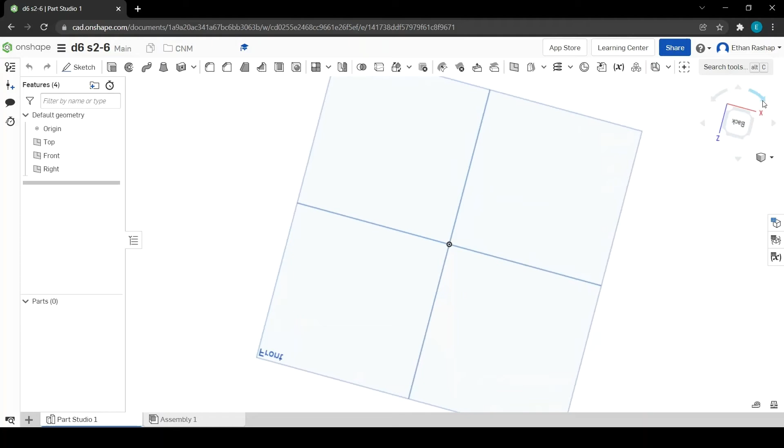Another thing you can do, if you hold down right click on your mouse and just move your mouse around, it'll also rotate that for you. And of course, if you want to zoom in or out, you can use your scroll wheel, and then if you hold down left click, you're going to be able to select, which we don't need right now. If you press down on your scroll wheel, which is mouse 3, if you didn't know that, it'll let you just move around in a two-dimensional plane here. And so that's sort of the important part.

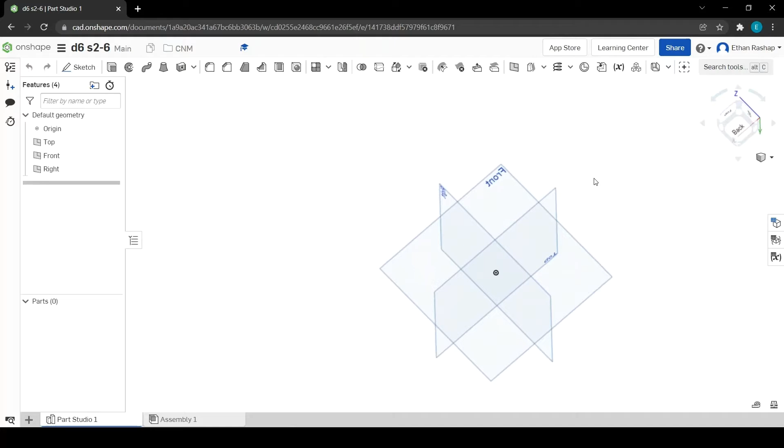If you really need to move around like this, that's great, but try and get comfortable. This program's sort of fast with how it moves if you hold down right click, but it works. And you'll see me sort of come around and look at things from different angles.

And so yeah, that's sort of the basics for this right now. As you can see, we're oriented in an XYZ axis, which is good to keep in mind as we're designing, so we can know our up and down, all that stuff. So yeah, this is a very helpful tool.

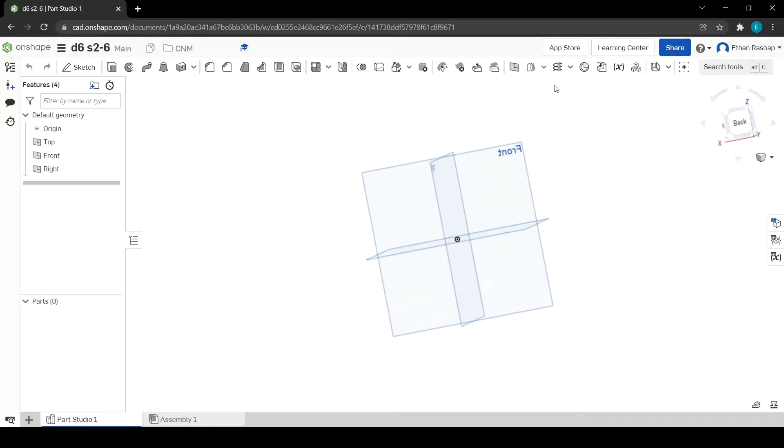I'll be using this a lot, more so than the right click and hold. I'll probably be using this a little bit more often this video, and then in later videos I'll transition to doing it a little bit faster with that right click. So just get comfortable with that. I know it can be a little bit hard, and this sort of moves fast, where you can get oriented really fast. As you can see, it's sort of moving around fast.

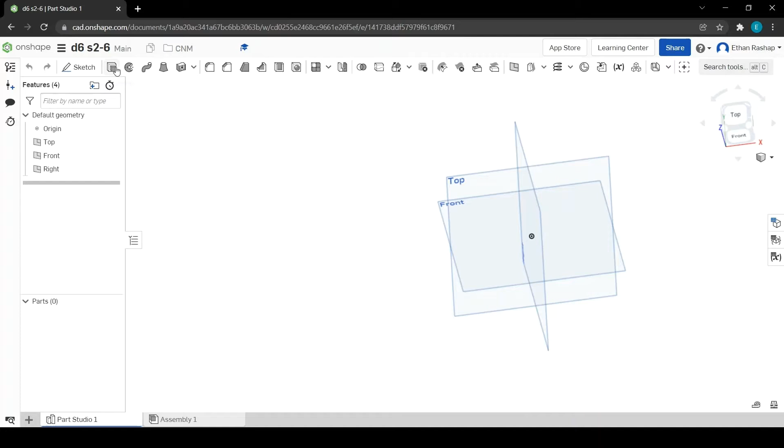But yeah, up here at the top of our bar, we have Sketch, which is how we do all of our drawings. I recommend you actually hover over each of these, it'll tell you what they are. Most of them are just names, but Sketch gives you an actual definition. So we're going to make sketches in CAD, and then we're going to make bodies out of it using these tools. We have extrude, revolve, sweep, loft, thicken, and all this stuff, plus some other features. Don't worry, we won't use all of these today, but we will get to them eventually.

Another feature I want to point out is this bar on the left side under Features. This is going to be like a list of everything you've done. As we go on, I'll point it out, but every step you make will be listed right under these planes, as you can see. Everything we make from here, all the sketches, all the bodies, will list under here, so it's a good way to keep track of your work. You can go back, you can move this bar around. Once I get more, I'll show you how. You can also search for stuff, which is pretty helpful. Parts will appear down here.

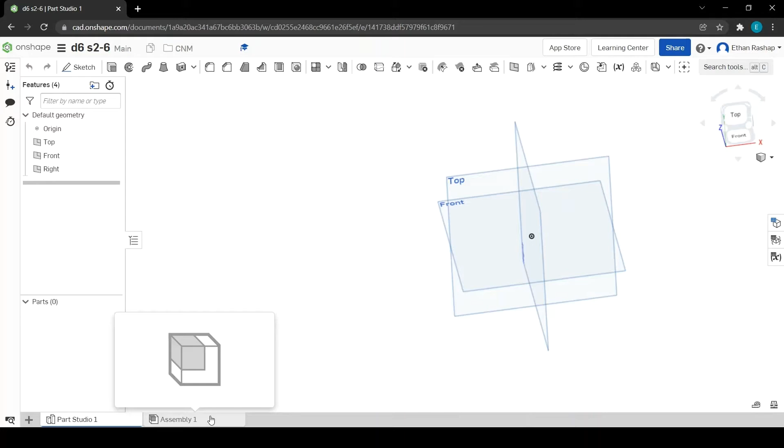So yeah, let's go ahead and get started with this. We're just going to make a simple 6-sided die today. As I said, we're going to have that side with the 1 on it detachable, so for that we're just going to make sort of a hollow cube missing one of its sides. Let's go ahead and get started.

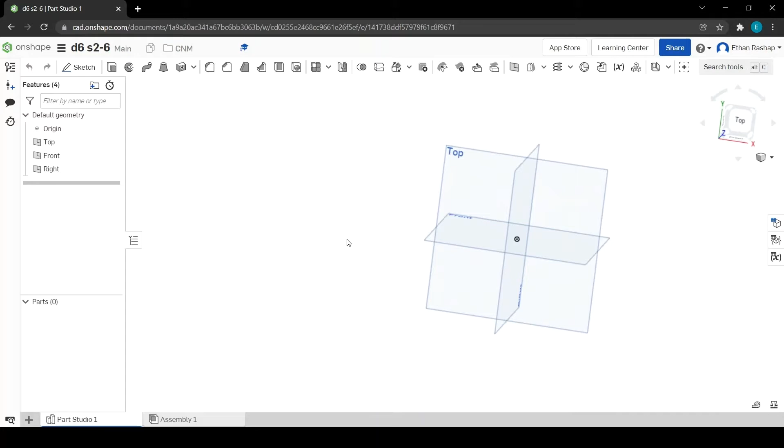You're going to come up to Sketch, click on Sketch, and it's going to have this box pop up so you know you're in Sketch. It's going to highlight this sketch plane in blue, wanting you to select the sketch plane. These are our 3 main planes right now, so we're going to use these. I'm going to select the top plane here, and as you can see, that's selected. We could change that if we wanted.

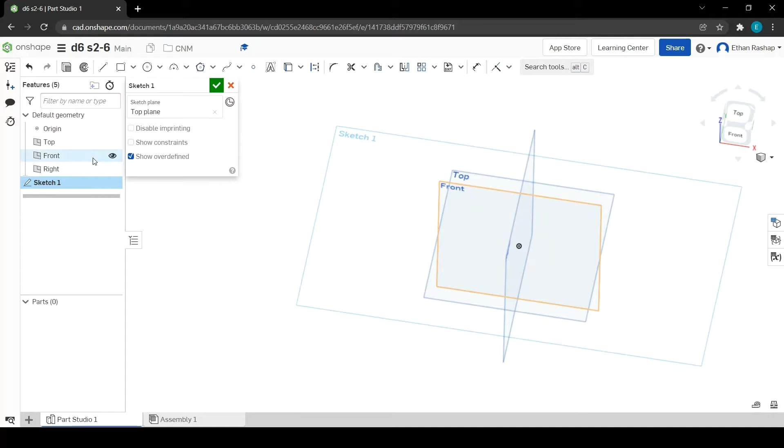I'm actually going to come over here, click this little eyeball for these other 2, and it's going to hide those planes. Now, just to make it ease of view, I'm going to click on the top here, on this cube on the side, and as you can see, it's going to bring us right down on top of that plane.

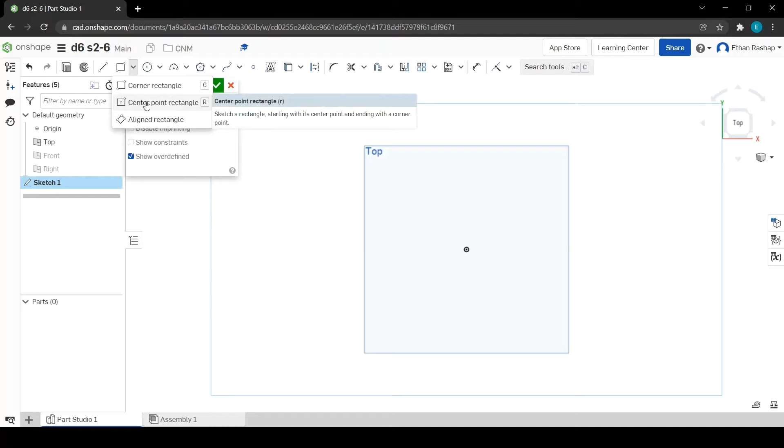Now I'm going to come up here to our corner rectangle. I'm going to click this little dropdown menu. As you can see, most of these have dropdown menus next to them for slightly different variations. This first one's a corner rectangle, but I want to use a center point rectangle, so I'm going to grab that. It's blue, so you can see it's actually selected. I'm going to click on this little origin point right here and just drag this out, left click again, and there we go. That's our first little square there.

I'm actually going to turn off this top plane too, because that's sort of just going to get in our way. So now we have this top little plane. Hit escape to get out of that rectangle. As you can see, I'm in it, but if I hit the escape key, I'm out. Otherwise if I was in here and tried to click around, it would just keep making rectangles, which I do not want.

So now I'm going to come up here to this little dimensioning tool. As you can see, these also have little shortcuts - the key in the parentheses. If you hit D, it'll put you into that dimensioning. If you do R... circle should be C, there we go. You can do that as well, but I'm not going to be doing that so you guys don't get confused. I'm going to hit this dimensioning tool.

I'm just going to hit this side. You can see as I pass over it, it'll turn orange, and when it turns orange, it means that I can select it if I left click it. And as you can see, I'm going to drag out this little bar here and click again, and it's going to highlight this number, so this is going to be the dimensions of that side there.

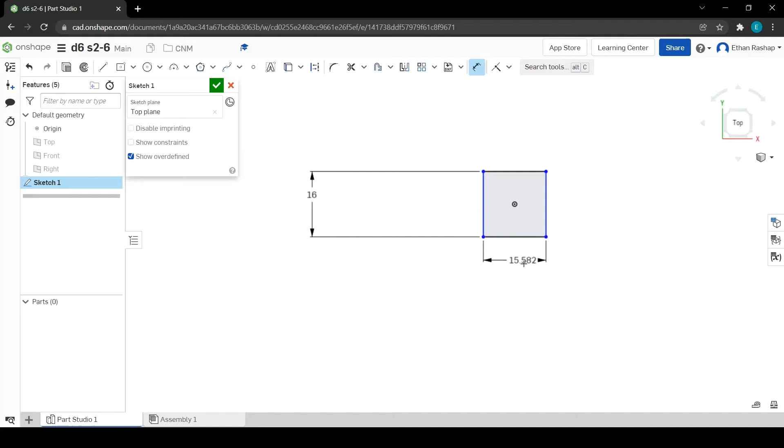So I'm going to make an actual size die, and I want this to be 16 millimeters. As you can see, it really shrinks that down. And I'm going to also do this side, make this one 16 millimeters as well. And there we go, so the purpose of this is just to square it off.

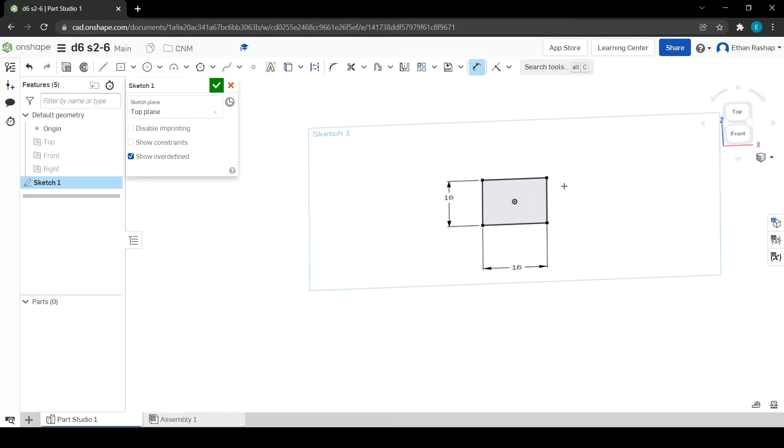You can of course dimension other ways, but this is how we're going to do it for right now. Just bear with me, and that's going to be all we need for this first sketch. As you can see, I'm holding down right click and moving. So once you're done with that sketch, come up here, hit that check mark, and you can see we have a nice little rectangle.

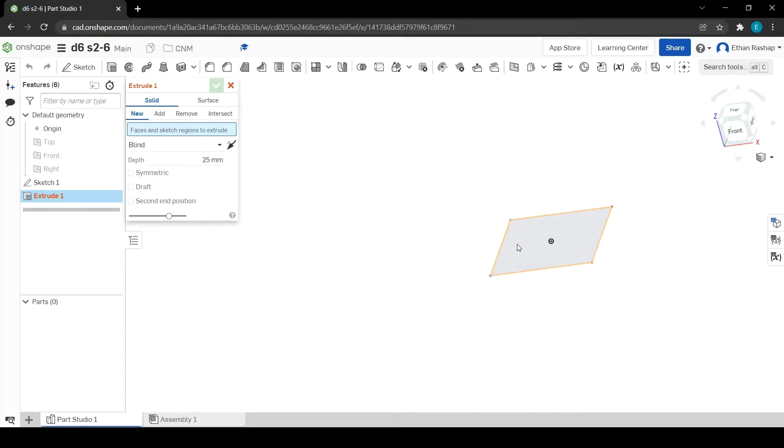But we don't just want a rectangle, we want a cube. So I'm going to come up here next to sketch, right to the right is this extrude button. I'm going to hit extrude, and it's going to ask for faces and sketch regions to extrude, which is going to be this one right here. As you can see, as I go over, it's going to turn orange. I'm going to click on that, and as you can see, it just pops it up. It's automatically 25 millimeters. We want to change this to 16 because we want a perfect cube.

Hit OK there. It's also worth mentioning here, I keep putting millimeters, but I can put just 16 and it'll automatically do millimeters. I could do 16 inches, and it will do inches. But the default for this program is millimeters, so you can type just 16 or 16 millimeters, either way it'll get you your millimeters. You can use feet, inches, meters. I assume you can use higher. I don't know why you'd be doing kilometers or miles or anything like that.

So anyways, this is good for right now. So I'm going to hit this check mark again, and there we go. We have our beautiful cube.

So now what I want to do is I want to make this hollow. And these programs all have this cool feature called the shell feature. So if we come right up here is this little box, I'm going to click on this. If we let this expand, create a thin walled part by removing one or more faces, specify the wall thickness for the remaining faces.

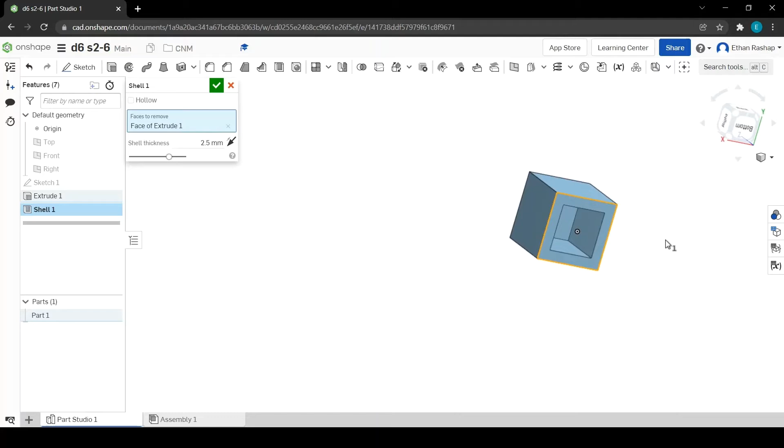So this is going to do, I'm going to click on this bottom face. This is the one I want to go away. And as you can see, it already is hollowing that out, which is exactly what we wanted. So now I'm going to shell this. If we come up here, I want this to be 1 millimeter. There we go, nice and thin there. And hit that check mark. So there we go.

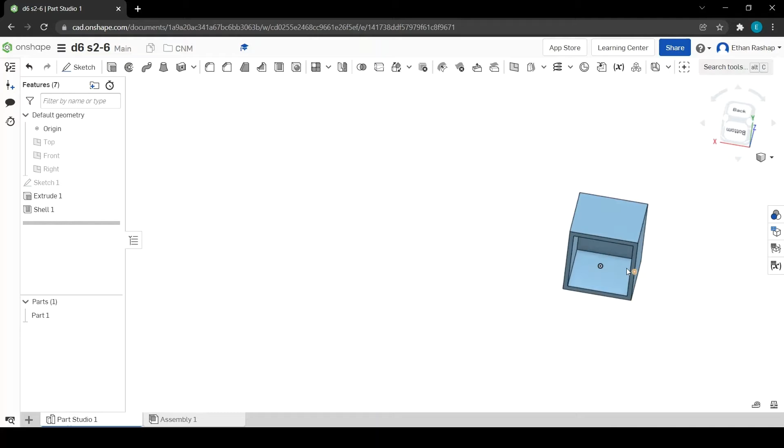So this is going to be the basis for the other parts to connect. We have some clips on the other side, but we need a little lip in here for it to snap into. And so for that, I'm actually going to need to make another plane to do it, because I don't want the lip here at the bottom.

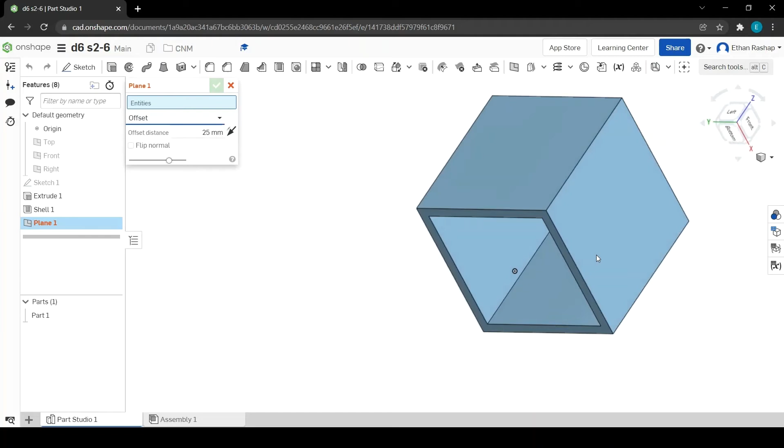So for this, I'm going to come up here to this plane, click on this. It's going to ask for entities to offset from. I'm going to come in here, zoom in here, click this bottom piece here. Let's zoom out so we can look at this. I'm going to click this arrow to reverse it, and I am going to make this 2 millimeters. As you can see, this is now inside of our plane, which is perfect.

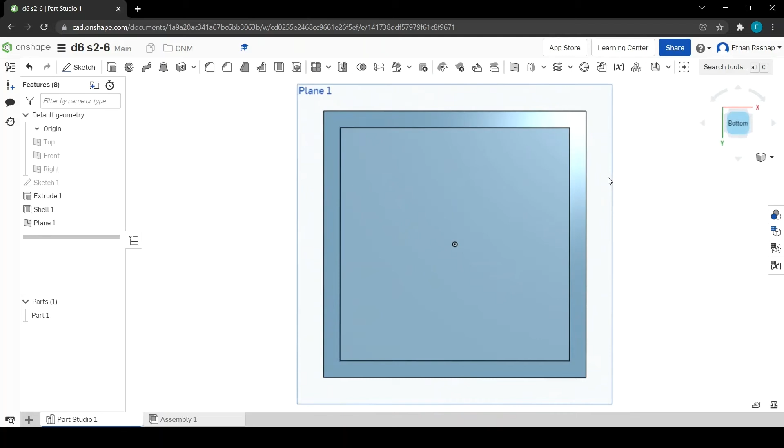It's what we want. Hit the check mark there, and I'm going to come over here to the bottom. And so to make this lip, what we're going to do is I'm going to create a sketch on plane 1. And I'm going to be using a rectangle, so let's make a center rectangle.

And we're going to dimension this just like we did the other one. So 16, we need 16 minus 2, so 14, and 14 to fit this inside.

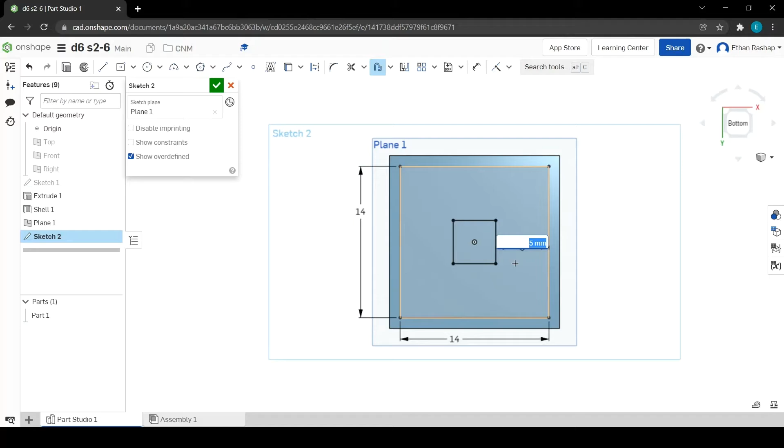Now we need another one inside, but instead of doing that over again, we can use this cool offset tool. If we hit offset here, as you can see, it made it outside. If we hit this arrow, it's going to bring it inside, and we can change this to 1 millimeter. There we go, we have a perfect offset there. It's sort of hard to see, but at this angle you can see it's inside.

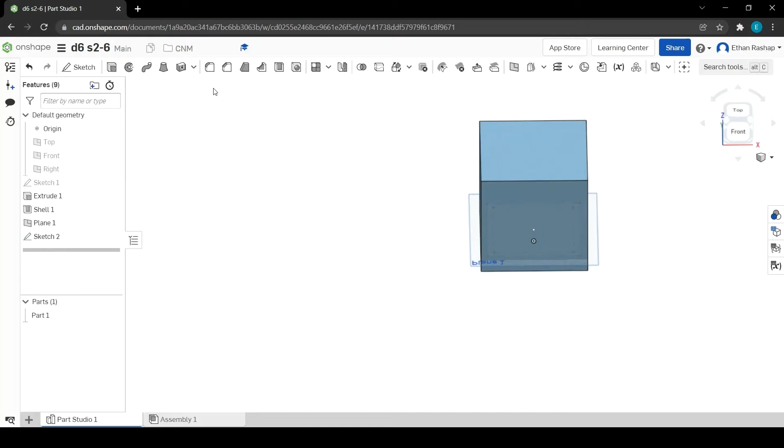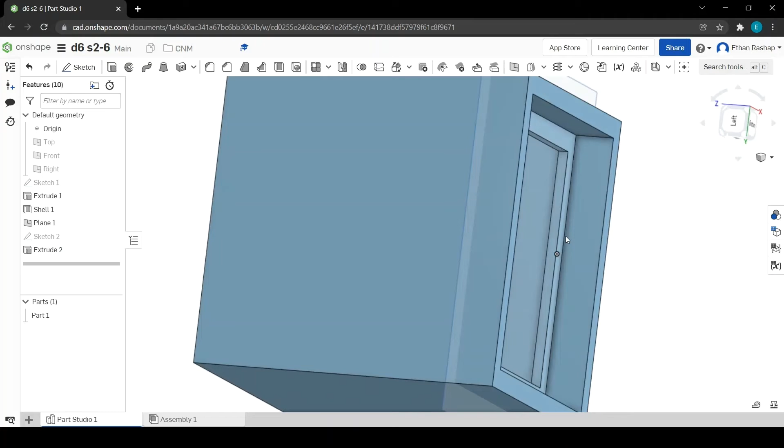Awesome. Okay, so now I'm going to hit OK on that sketch, come over here to extrude, and I can just click on sketch 2 here on the side. And it's going to go the other way - I don't want that. I want this to be 0.5, and it's going up, which is perfect. I'm going to hit that check mark there. And as you can see, we have this beautiful little lip here, which we'll be using later to attach everything.

So now let's go ahead and put some numbers on this die. On a die, the opposite sides add up to 7. So opposite of 1 needs to be 6, 3 needs to be 4, 2 needs to be 5. So let's go ahead and get started.

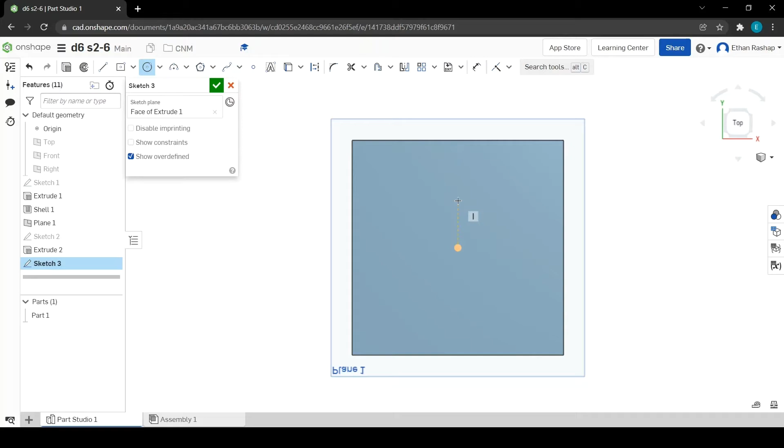On the 6 first, I'm going to sketch. I want it to be on this face, so I'm just going to click here. I'm going to go back here to the top, and so I just need to make some circles. As you can see, if I line up, it's going to show me that I'm directly going in a vertical line away from that origin, horizontal, vertical. I'm just going to click here. As you can see, I misclicked there.

I'm going to dimension this to be 2.5, and I'm going to dimension this from the center 3.5. There we go. And so now I could go sketch the other 5, but I'm going to show you some other tools on how to do this well.

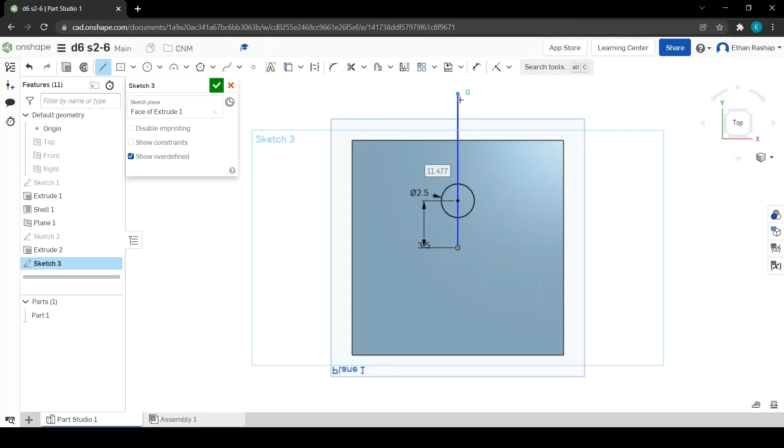I'm going to first create some construction lines, so I'm just going to make a line here and make another one this way. As you can see, these are real lines right now, they're intersecting with my sketches, but if I come on here and right click on here and come down to construction, this is no longer part of my sketch. It's just a reference line that I can use to dimension, build off of, all of that fun stuff. So for right now we can sort of ignore these - I'll show you why we need them in a second.

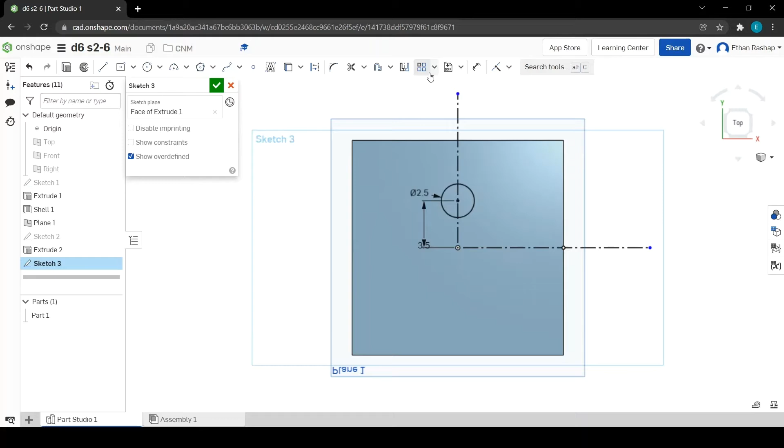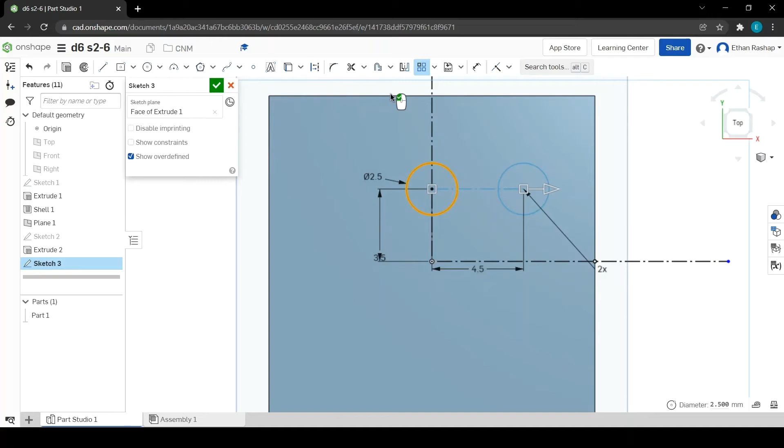We're going to come up here to linear pattern, hit linear pattern. I want to linear pattern this. I don't want this to be 25, I want this to be 4.5. Bring that in. I don't want 3, I just want 2. There we go. As you can see, it just pulls it out. I can actually move this if I wanted to and increase the number however much, but I don't want to do that, so I'm going to make this 4.5 again. And there we go, I'm just going to click out of that, and there we go.

Another cool thing, much like linear pattern, is this mirror function. So I'm going to click on here, and it's going to say select a mirrored line. I'm going to select this line right here and select entities to be mirrored. We want these 2 circles, and as you can see, they appear right there. So I can just click and hit escape, and there we go.

I'm going to move this out of the way. So there we go, we have those 2. We need 2 more over here. So just like with the same mirror, we're going to use this as the mirror line. Boom, boom, there we go.

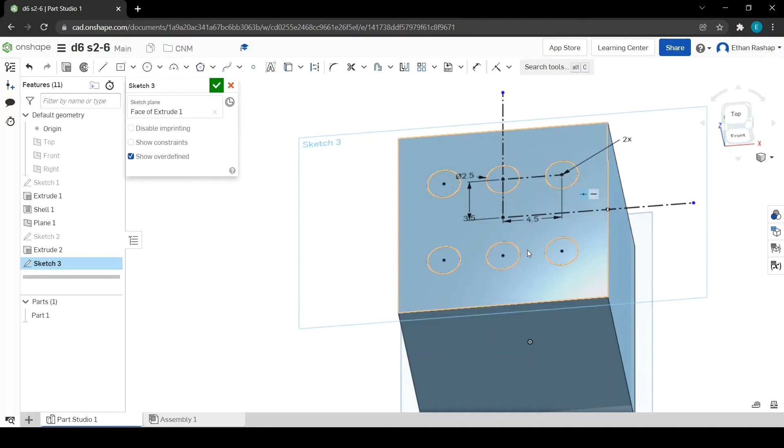And as you can see, we have this beautiful 6-sided die, although we need these to go in, right? They are cut into the die. They're not just on the front, because you wouldn't be able to see these, especially if you print it out.

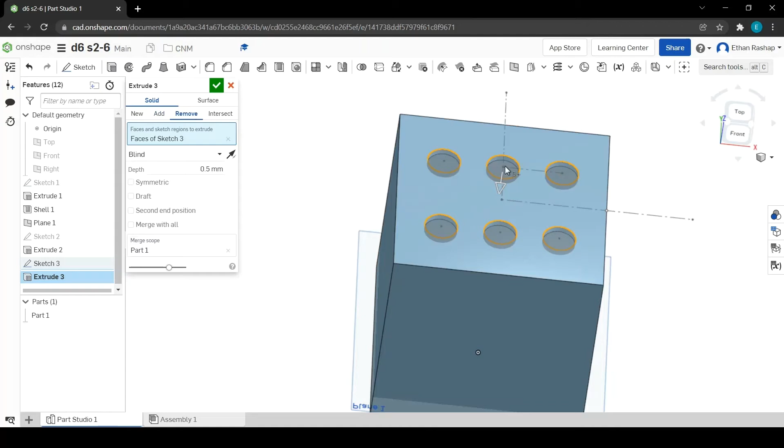So let's go ahead and hit extrude here. As you can see, they're far up, so we're going to want to do 0.5, and they're still pointing up. I want them to go down. It has an issue here because it's trying to add stuff, but I'm going in, so it can't do that, it's trying to remove. So I'm going to remove, and that issue clears up, 0.5 millimeters. Hit this check mark, and there we go. There is our first set of numbers on this die.

Let's go ahead and move to the next one. As you can see, I have this plane down here, plane 1. I'm just going to click on this eyeball, get rid of that, we don't need to be seeing that.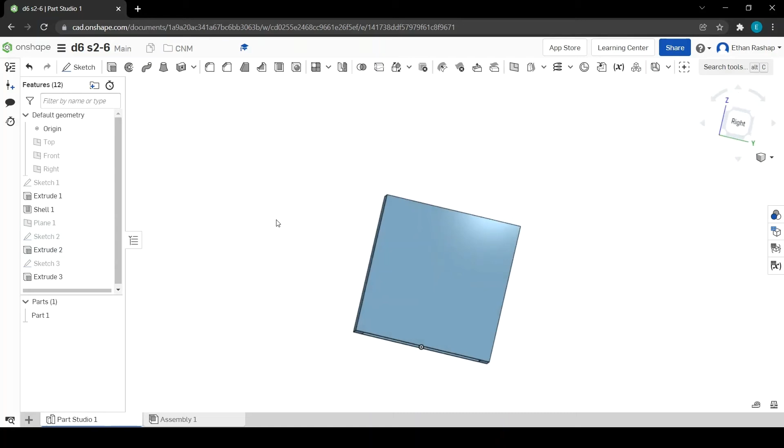Here's actually what I was talking about earlier. As you can see, we have all our parts here. If I grab this bar and move it up here, it's going to reverse it back to that point. Your stuff doesn't go away, it's just going to reverse it so you can see it. There we go, see? We are back to how we were.

Let's go ahead and make the 4 side next. So sketch this side, come in here to the right side, and I'm going to create a line all the way down here. Right click on that, construction. I'm going to also create a line, and let's just make one more to make this easier for ourselves.

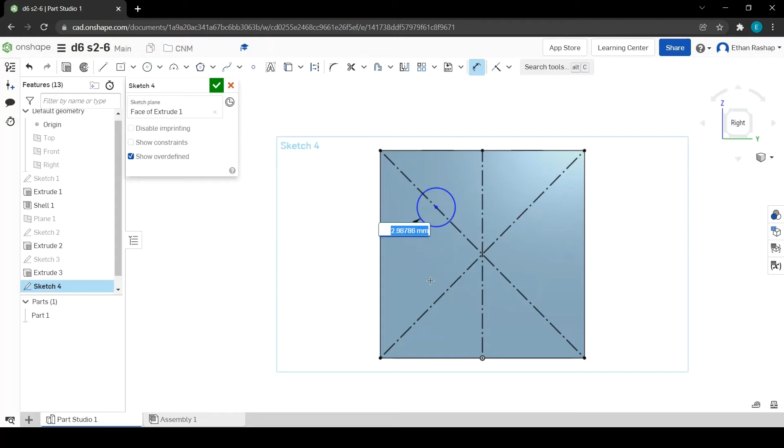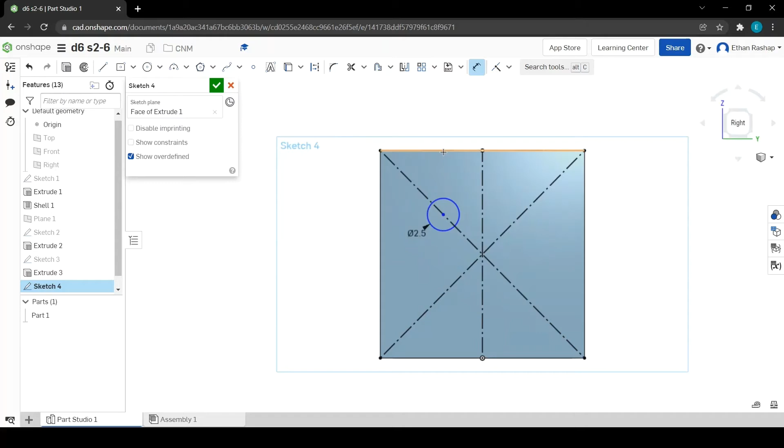Now what I'm going to do is create a circle somewhere on this line. I'm going to dimension this 2.5, move this, I want this to be... now you can see I can sort of move it along this line here. I want this to be 4. Let's see if that would work, yeah, 4 works.

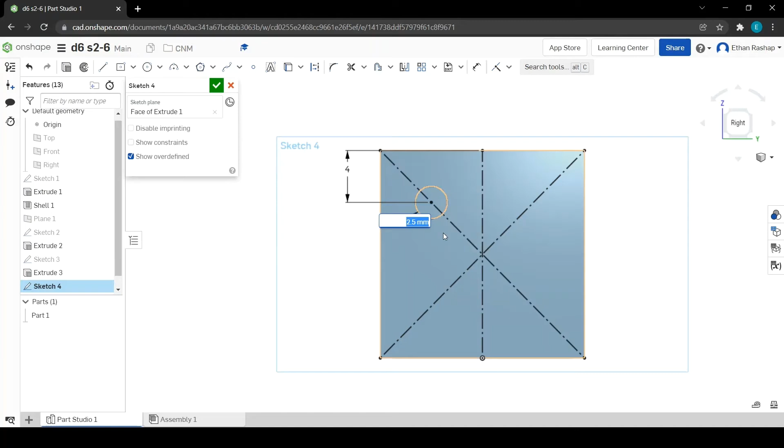If you make it on the line like I did, so say I make the circle on here, it will only... sorry, Control Z, get that away. And dimension it, obviously that's not working right now, I'll show you that in a second. So here we go, that's the first one. Let's actually make this into 3.5. No, that's too big, let's do 3.

That's good enough. So now we can do the same thing we sort of did before. Let's mirror this across this. Boom. Hit escape, there we go. We got 2 going so far.

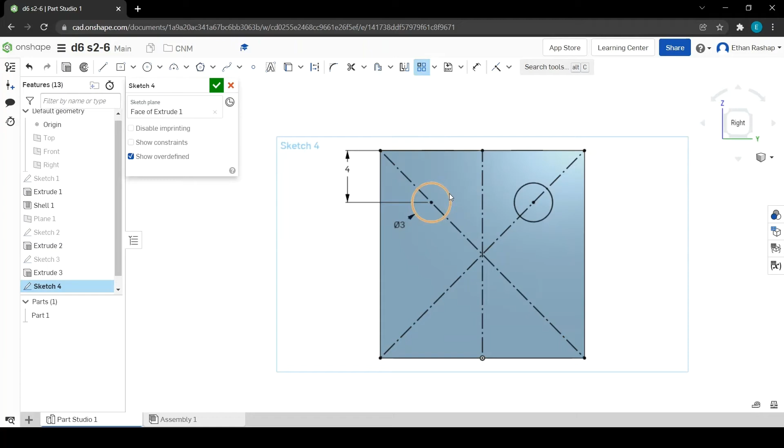So now let's try and use that linear pattern again. I'm going to linear pattern these. I want this to be, let's see, 4, 4, 8. I want this to be 8 millimeters. Now you can see it sort of lines up there.

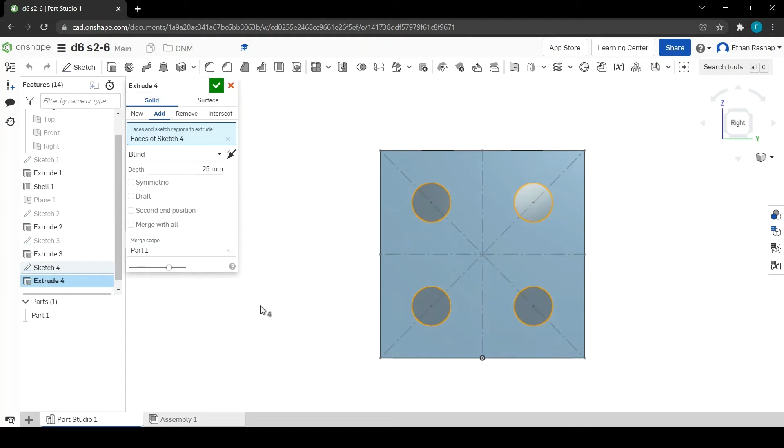We're actually going to get to go back this way. We're just going to create another line here, and we'll just mirror these across this line, boom, hit escape, come back here to extrude. It's going to have those selected already because it's a smart program, 0.5, switch to remove, down, hit OK, there we go. So we have 4 there, 6 there, we're going to need 3 on this left side.

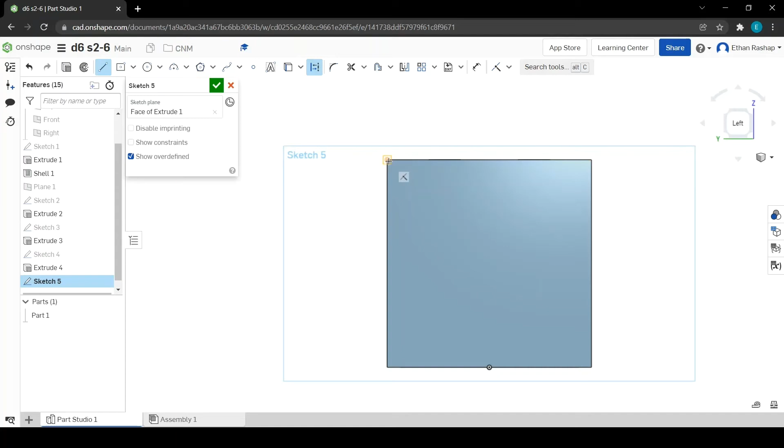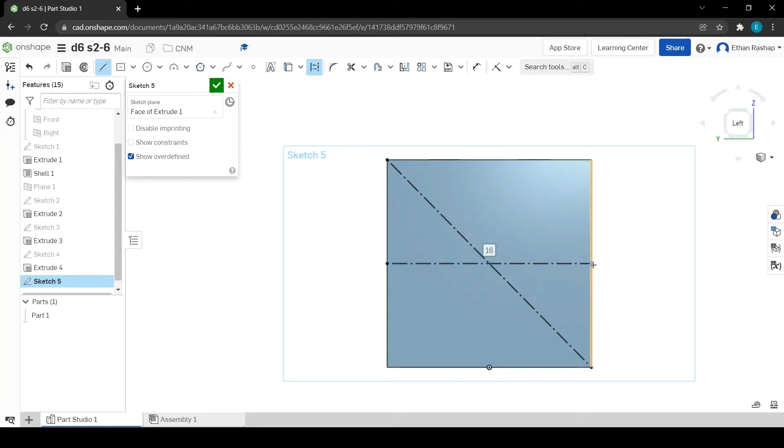Take it nice and slow. So I'm making that construction line across there, and I'm going to... I'm actually going to make another construction line here, over to here. Circle, circle. Dimension this to be 3. I'm going to want this to be 3.5, because we're going to have to go, let's actually make that 4. There we go. So we're going to want this to go across this line here.

So now let's make another one here at the center. I can make another one over here. 3, 3. We want this one from here to be the 4 as well.

No, I did that from the side if you saw that. Delete that, delete, there we go. Dimension from the center out to the side here. Make that 4. There we go, so that one's centered.

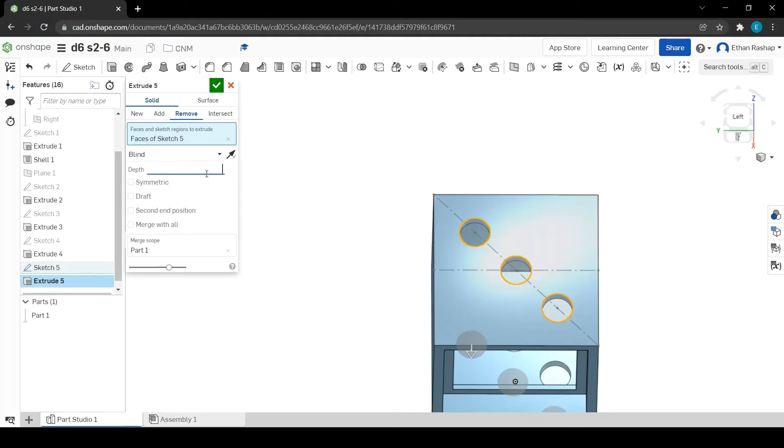Those are all good. Let's extrude these. Remove, 0.5, and hit OK there. So now we have our 3, our 4, our 6. So now all we need is our 2 and our 5.

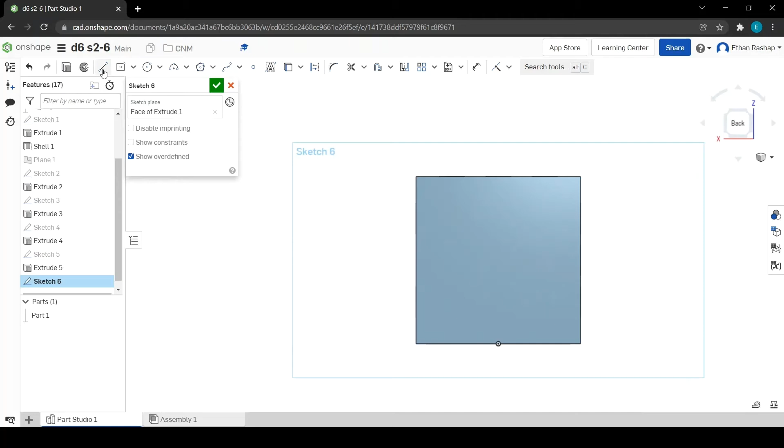Let's do the 2 on this side. Go right to it. Create that diagonal there, I'm just going to right click on here, construction. Now we can draw our circles. As you can see, that made that a construction circle too, so let's exit out of that. Do one there, one there.

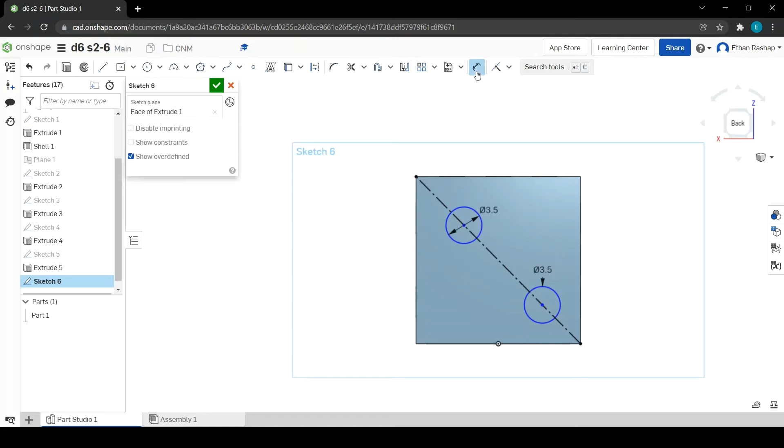Let's make this 3.5, we want this to be a little bit bigger, not too much, but... And let's dimension these from center to side. Dimension, center point to side. Let's make this 5. Center point to side, 5. There we go, nice 2.

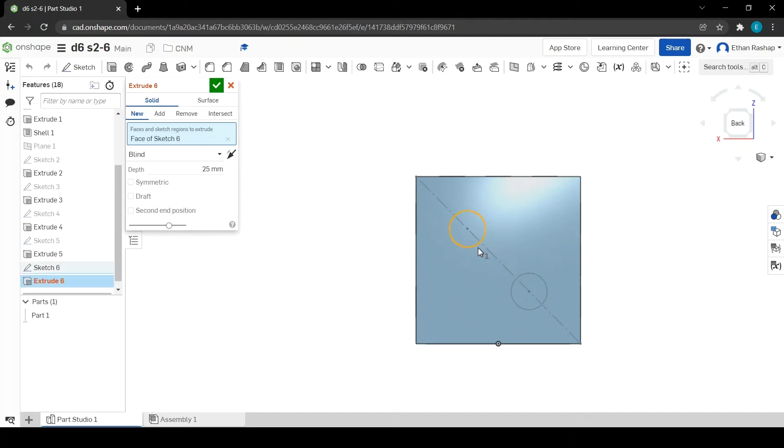Hit OK there, we can come over here and go to our remove, 0.5, hit OK, awesome. So now all we're missing is our last side here, our 5.

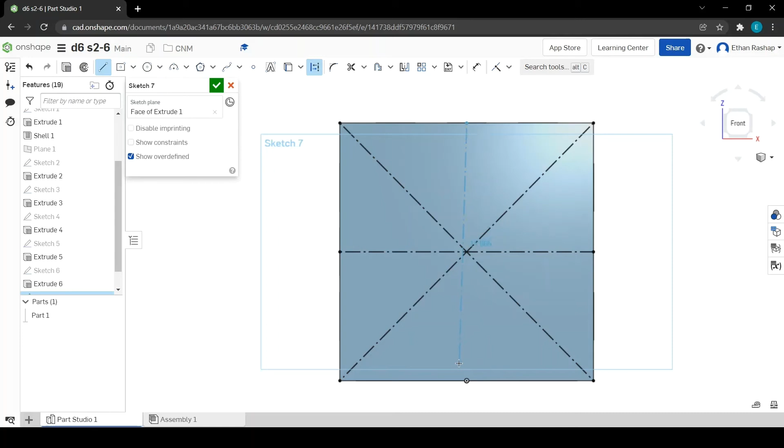I'm going to come in here and do a construction line. We'll just do the mirrors this time, just to get some more practice in with that. So let's go ahead and do this. We want this to be 3, and on the center here we want this to be 3.5. Now we need to make one more in the middle.

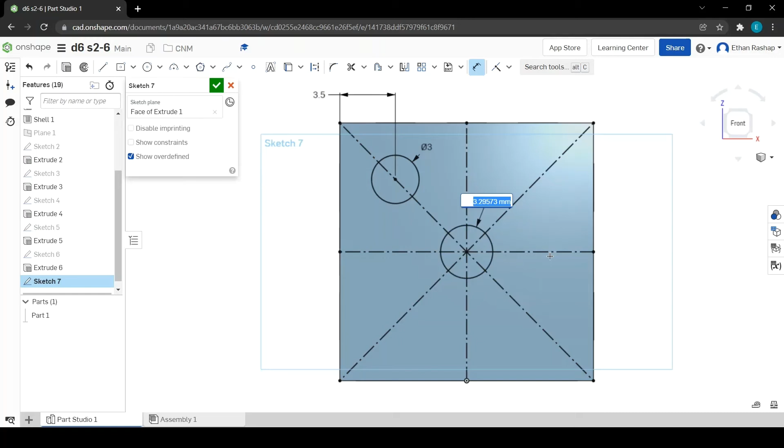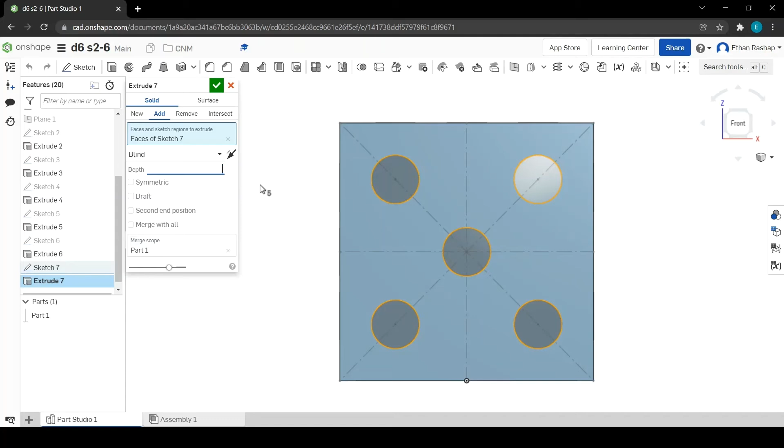Now we can go ahead and just mirror everything. So let's mirror across here, hit escape, mirror again, this line, select these two, hit escape. Now let's come over here to our extrude, 0.5, remove, and hit OK there. So as you can see, I'm sort of looking at this.

Part of this is sort of problem solving at the same time. I don't like how that 2 is uneven, so let's go back here to these 6. Let's double click on that back here, and let's change these back to 3. This is the great part about this software, we can just sort of change this whenever we want. And I want these to be a little bit closer now because they're a little bit far apart. So let's do 5.5. There we go. And hit OK there.

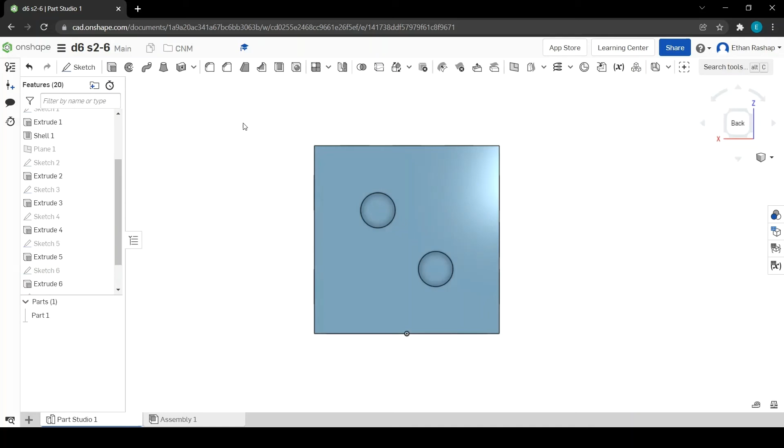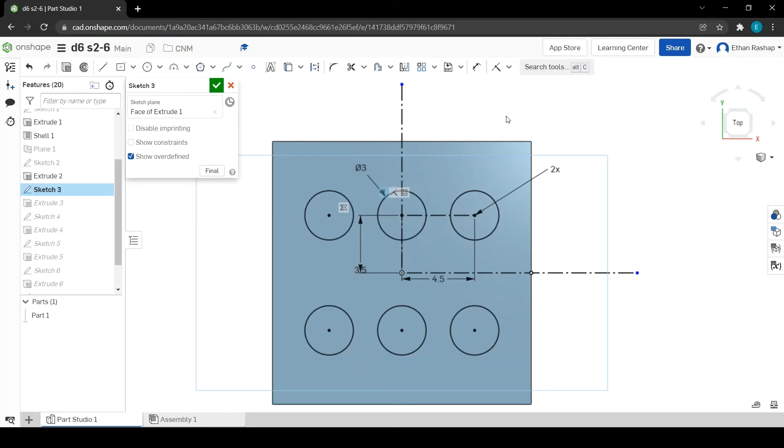And it's going to go back because it's still using that extrude. So now let's actually go back to this top sketch here, because I want to change this too. These holes are looking a little bit small, so let's go ahead and edit these to be 3. And since all of these were referenced off of this one, changing this one to 3mm changes all of them. So I'm going to hit OK there. And there we go, so our cube right now is looking pretty good.

Last thing we want to do, these edges are sharp. We don't want sharp edges on a cube. We want it to roll, we don't want it to hurt when we're holding it. So we're going to come up here to use the Fillet Tool. I'm going to click on here. If I just hover over this for a second, create constant or variable edge, it's basically going around the edges. So I'm going to click on this.

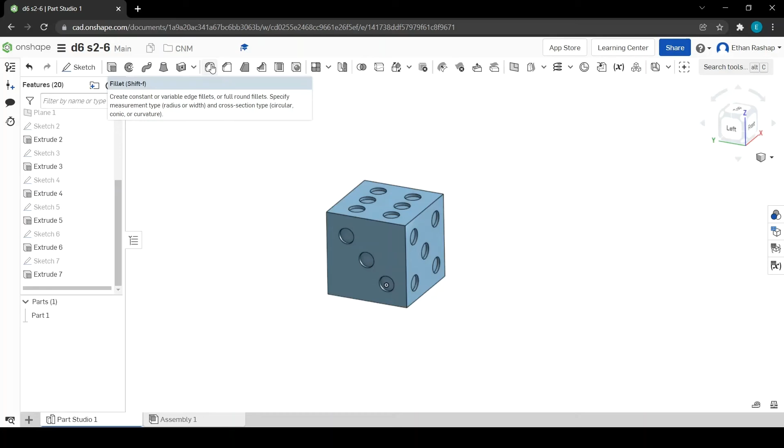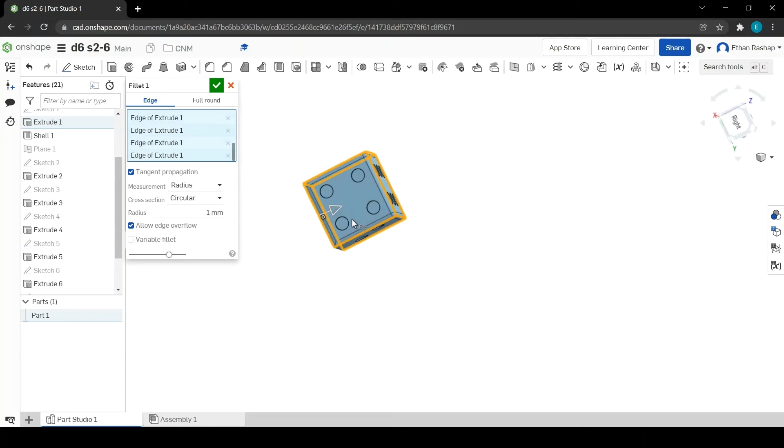I'm going to change this to 1mm. It's going to ask for edges. I'm going to click all of these outside edges, including these bottom ones. And this one. There we go, it's sort of hard to see now, but if we hit that check mark, we can see we have all rounded edges now.

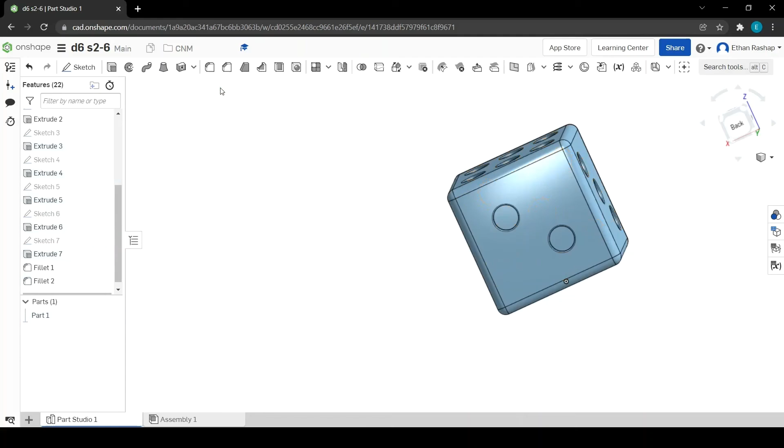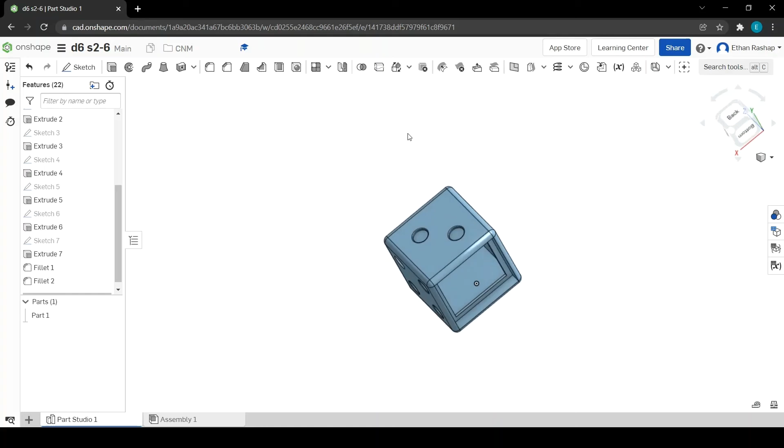So now, great thing about cloud saving is it saves automatically, so we don't have to worry about that at all. But we can come in back here. I'm going to come back to document menu, and I'm going to actually go back to CNM, and I'm going to create a new document D6 S1 for my side 1. Hit OK there.

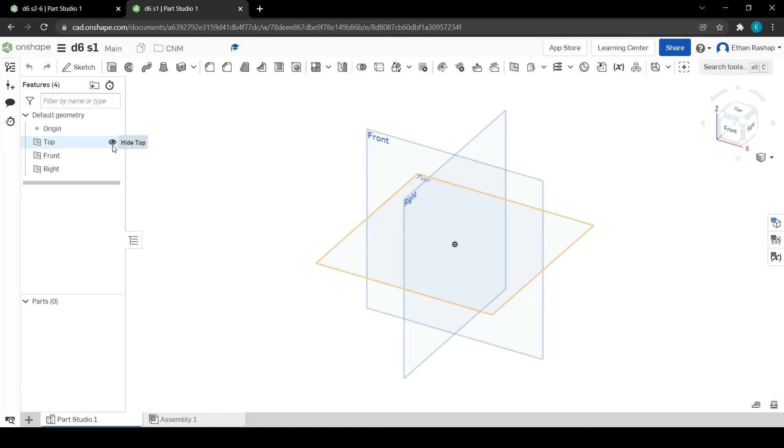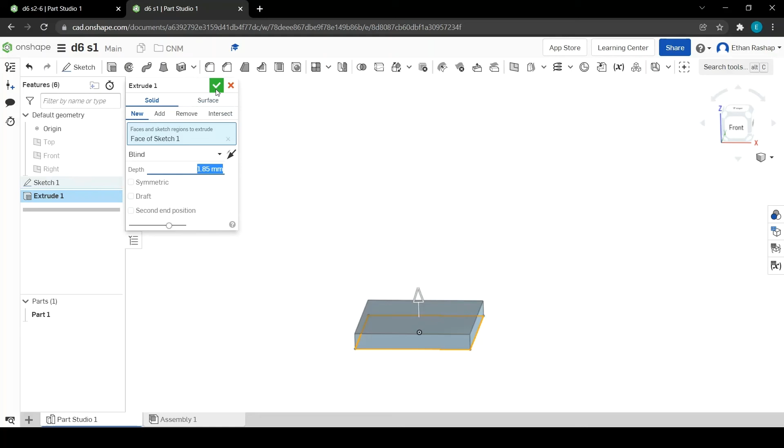Same thing, same as we did last time. We're going to start with the sketch on the top plane here. I'm going to go a little bit faster through this, just because you guys already know the basics. So I'm going to create a center point rectangle, pull that out, exit. This one is going to be 13.8 by 13.8, perfect size right there. Hit OK for that. We're going to extrude this, and we only want this to go up 1.85. Perfect, there we go.

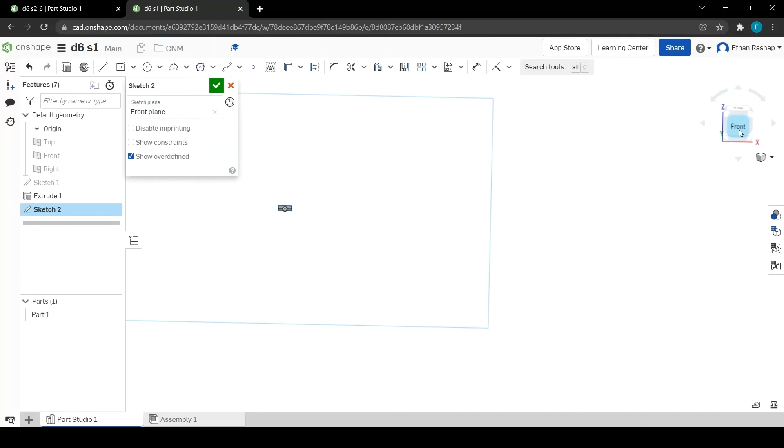And I'm going to hit the OK there. So now I actually want to bring back this front plane. As you can see, it sort of intersects perfectly there. So what I'm going to do is create a sketch off of this front plane. We're going to make that front plane disappear. Front, it's going to zoom in here, but we're working like halfway through here. So we're going to make a little clip now. So I'm just going to start off with some lines.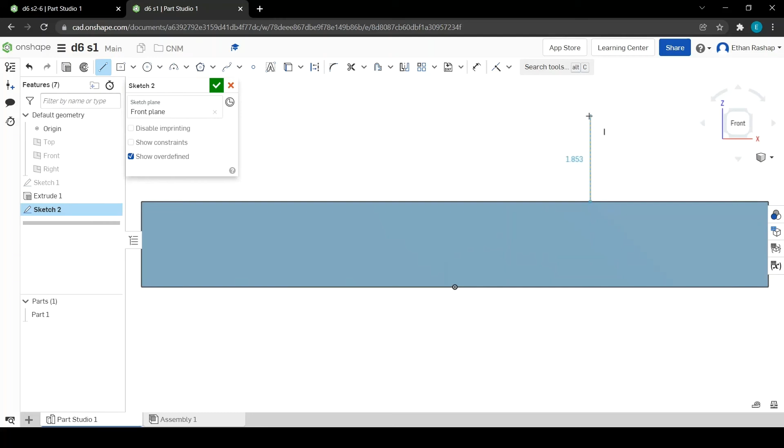Front, come up here, just sort of make something perfect on the front there. That looks good. And so now we can just sort of come through and dimension everything that we want to.

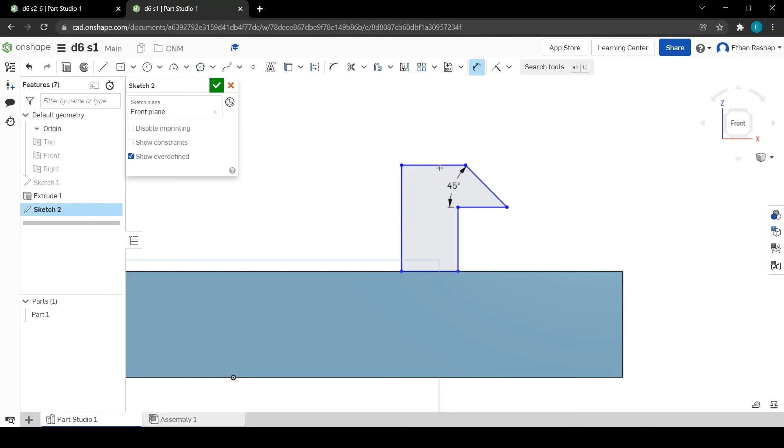So these are the dimensions I've used, so just bear with me for this. This side, let's do this angle first. It's going to be 45. This distance right here is going to be 0.7. This here will be 0. From here to this edge is going to be 1 millimeter.

We're going to need to constrain the rest of it first. We're going to come in here. This distance here is going to be 0.3. Pull that in a little bit. This distance from here to here is also going to be 0.3. And we're going to make this last distance right here 0.15. So perfect, a perfect little clip here.

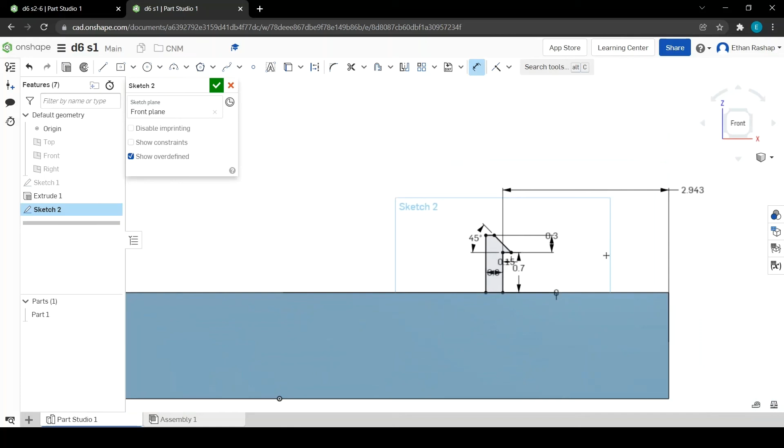And now we can come back here, change this to 1. It'll pull that to the edge exactly how we want it. Sorry, I was just looking at my notes. So that looks good here.

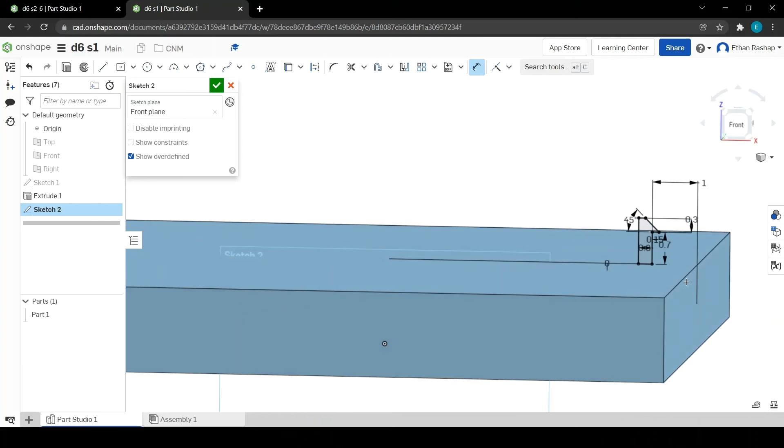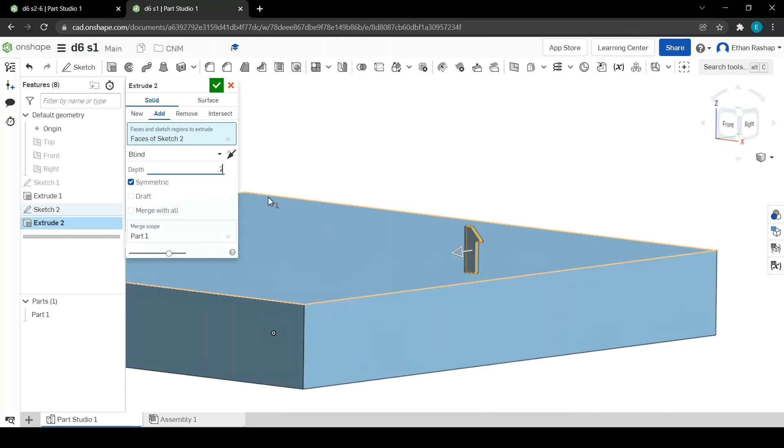We're going to extrude this now. So come up here to extrude. We only want this to be out 0.125 millimeters on each side. So there's one side. We want to make this symmetric, so it's actually going to pull that into the middle, so we could do 0.25. And we can hit OK there. Perfect.

So now, let's actually go back into the sketch for a second. I'm going to come down the front. I'm going to make a construction line from this origin going straight up, and we'll see why in a second. Just hit OK there.

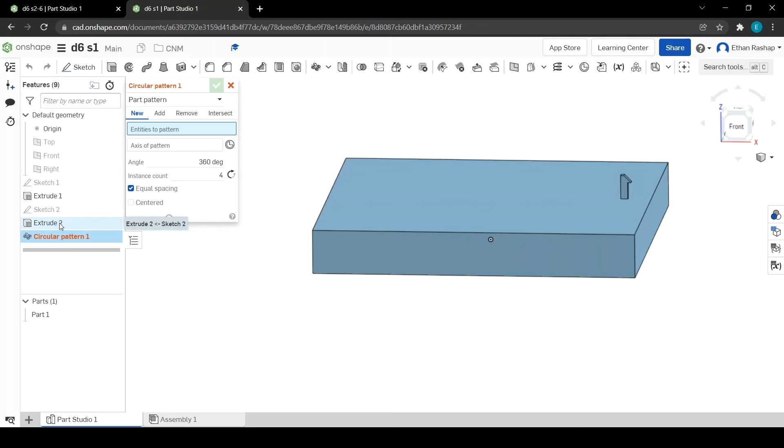So now, similarly to how we did the pattern before with the linear pattern, we're actually going to use a circular pattern now. So we're going to come up here to this drop down. It says linear pattern, we're going to change this to circular. Click on circular. It's going to want entities to pattern, for this we're going to choose extrude 2. Let's do axis of pattern first. We want to click on this line, entities to pattern, extrude 2.

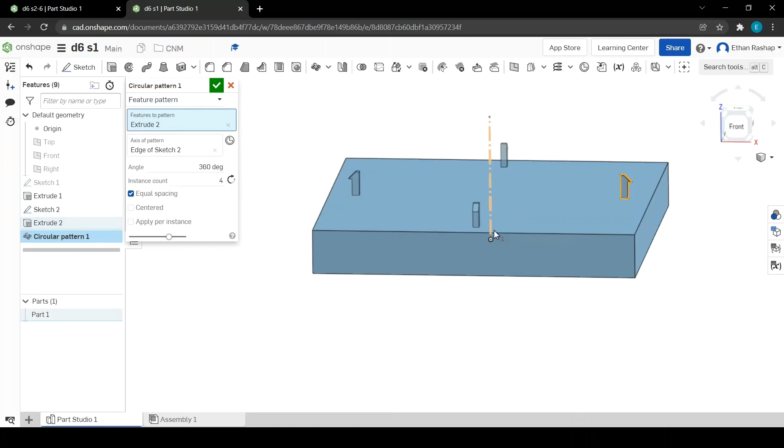We need to change this to feature. There we go, extrude. And as you can see, it pulls it around. We can also increase this number. If we did 5, it's going to evenly space these. We just want 4, so 1 on each side, 360 degrees, edge of sketch 2. Hit OK there. And there we go. So those will slide perfectly into our base there.

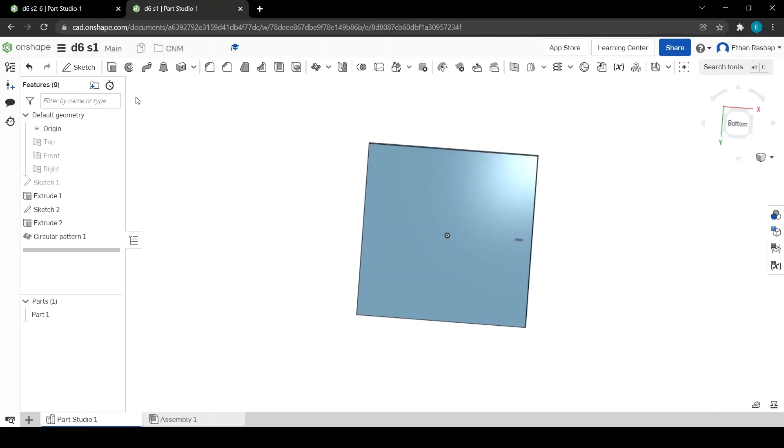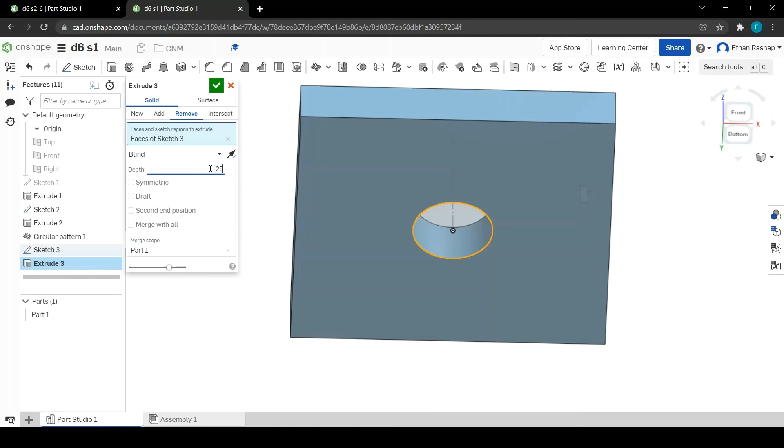So now, last thing we got to do is make a little dot here. So sketch this face, bottom. We're going to come through here, circle, really easy. Dimension this, let's make this 3.5. Extrude this, remove, 0.25. 0.5. There we go, there we go.

And lastly, we can fillet this edge right here. Hit 1.25. Hit OK there. And there we go, nice and rounded. So now we have both parts of our cube, of our dice.

Alright, so now that we have our two parts, we can go ahead and put the two together. To do this, we can come in and on this bar at the bottom, hit this little insert new element, create assembly. So now from here, we're going to come into insert, and we're going to go to other documents. This is the one we are building off of. Other documents, we're going to take part 1 here. Just click anywhere, doesn't really matter. Come back to current, we're going to take our part 1, put this here, hit the check mark.

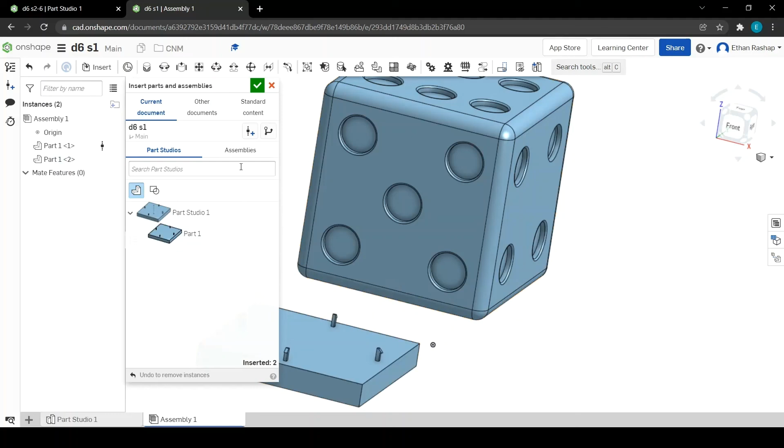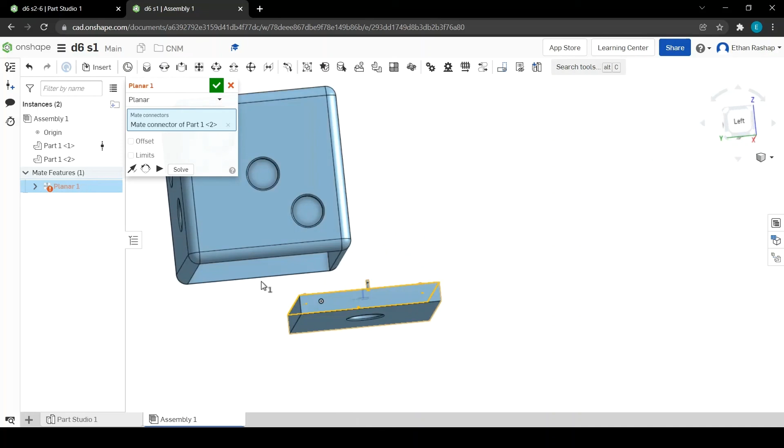So now we have our two parts, but we want them to go together so we can actually look at them. To do that, we're going to be using mates. Right now there's a lot of mates, we'll go over some of the other ones later on. The important one right now is planar. I'm going to come in here, click the top here, so it selects that whole top. Look into this one, zoom in so it actually gets it, and I'm going to hit that check mark there, and as you can see, it slides in there. And so there we go. There's our die with that side inserted. It's sort of cool to be able to see this all put together.

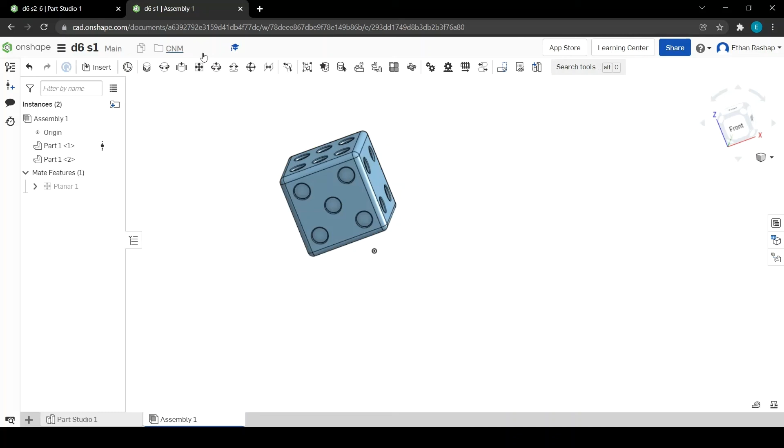And there we go, so we made the two parts. We were able to put it together in this assembly here, so we could look at it. And we got to learn some of the tools. I hope you learned a lot, and I look forward to seeing you guys in the next video.